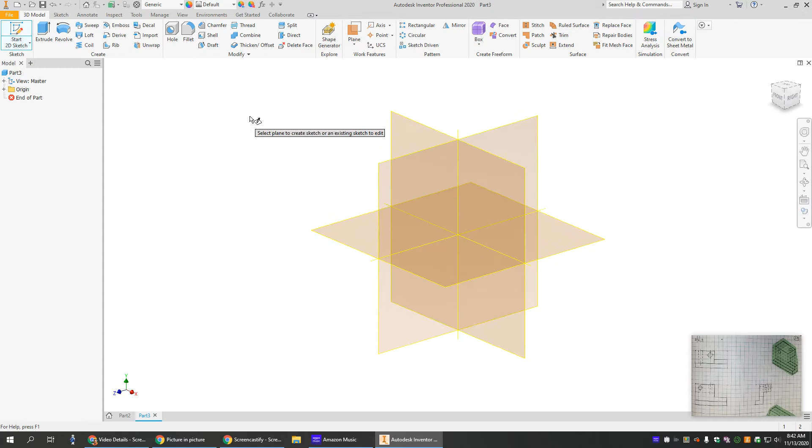All right, in this video we're going to do Isometric 3, which is this weird, funny little shape. So again, we start by clicking the pencil in the upper left corner to start our 2D sketch. I like to start with the front, so I'm going to click the XY plane.

When you draw this one, you have to have a plan of attack. It's got a lot of funny little pieces on it, but I'm going to draw that front view down here. Sorry, that was the top. Here's the front view - I'm going to draw that whole shape, that funny looking flag shape that's laying sideways.

I'm going to do that by drawing a couple rectangles together. It's easier for me sometimes to count using my multi-view since we've drawn a multi-view. So it's 1, 2, 3, 4, 5 up, and I'm going to draw just this first square part, which is also 5 across.

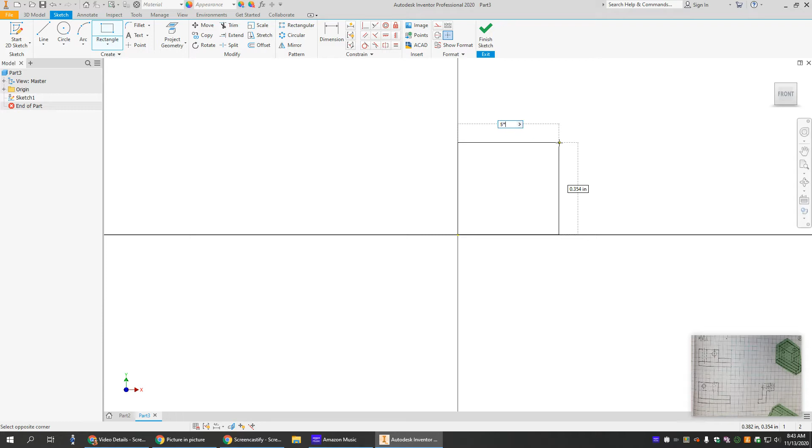Remember, you can do the multiplication in Inventor, so I can do 5 times 0.25 tab, or if you know that's 1.25, you can just type 1.25 and hit enter. Again, it makes it so big you can't see it, so click your view cube front - it zooms it back in.

I've got to make this little piece that sticks off to the right hand side. It is 3 across and 2 high. So I'm going to start right here - when we get the green dot, click and move out. So it's 3 across, which is 0.75, 2 high, which is 0.5. And now we have that flag shape.

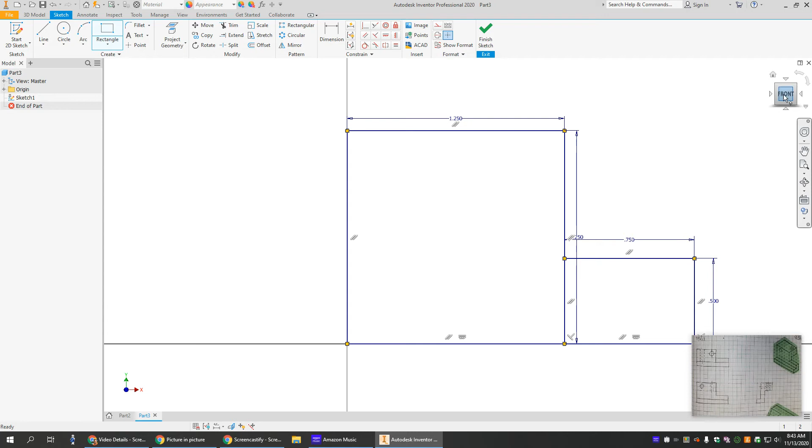So I'm going to go ahead and finish my sketch. Okay, now we've got to decide what we're going to do because we have this thickness. Are we going to make it all the way through and cut some off, or are we going to make just this thin part and add on the pieces?

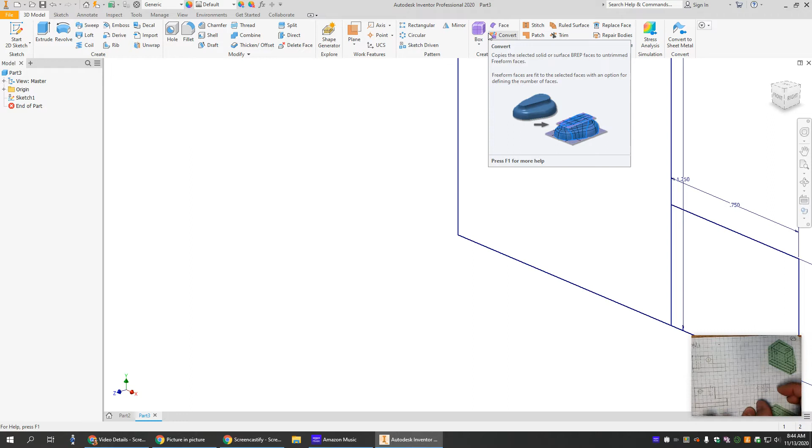I think at this point I'm just going to make that skinny little part from the right-hand side. So I'm going to only make it 1 thick, and then I'm going to add on this little part and that little part on the front. There's lots of ways to do this - it just depends on how you see it. But this is how I'm going to do it.

So I'm going to extrude. I want to extrude this part and this part, but I'm only going to go 1 thick like I said, so it's only going to be 0.25. And say OK - and it looks like, oh, I have nothing.

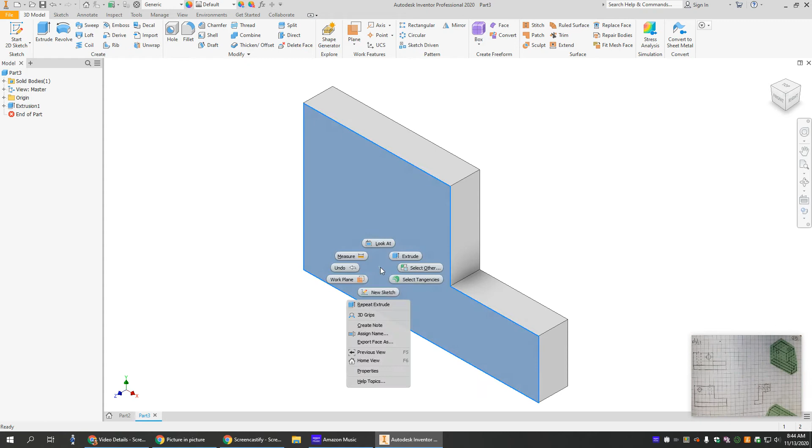So now I'm going to put this little step that sticks out on the front - that little piece that sticks out on the front right there. So I'm going to draw a new sketch on this front, and I want a rectangle going all the way across. I'm going to start here and go all the way across to there, so I want it 2. You can type in 2, which I think is easier, and then 0.25 because it is 1 square high. That's all I need for this part of my sketch.

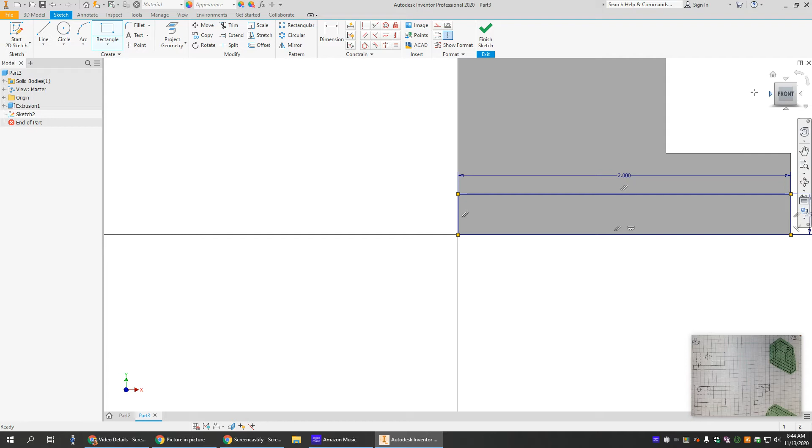So I'm going to finish my sketch. I'm going to extrude that part - since I had 0.25 last time, it remembered and just gave me the same. So I say OK, and now you can see, oh, it's starting to look like it now.

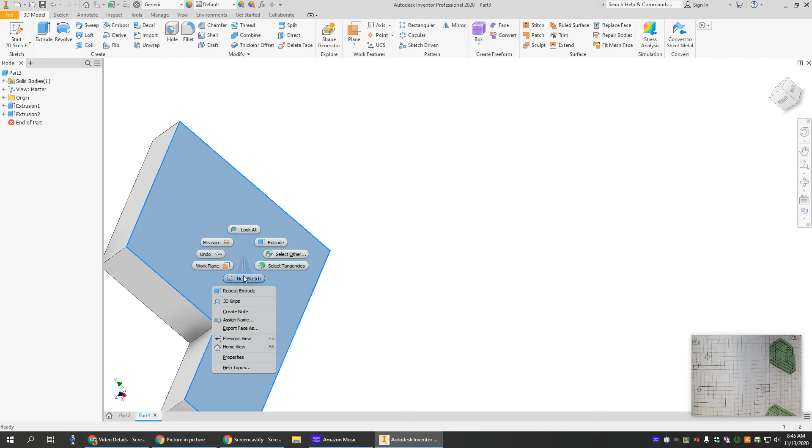But now I've got to draw this little bump on the back. So I'm going to hold down my Shift key, push the scroll wheel, and that allows me to spin it. It doesn't matter how I spin it, just so I can see the back. Right click, new sketch, and it zips around. I'm going to click my view cube, bring it down in the center - it helps me see it. I think it's nicer. You don't have to do it, but it makes my life easier, I think.

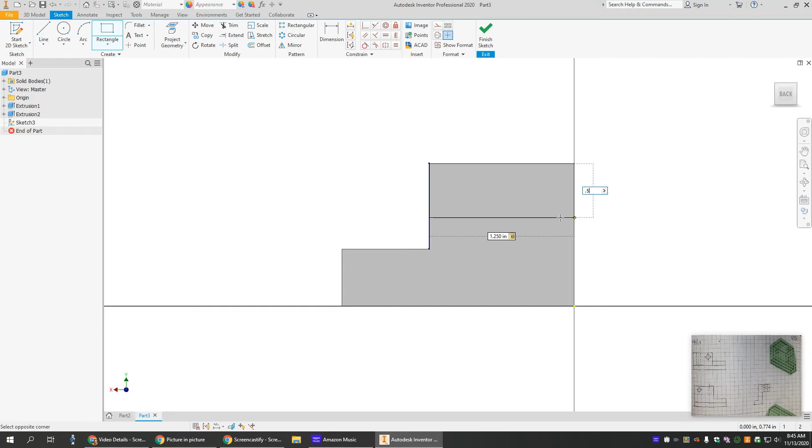I'm going to click my rectangle and draw it across. I know it goes all the way across, which is 5. Then we have to decide how far down it goes—it goes down 2, so 5 is 1.25, and 2 cubes is 0.5, since every cube's 0.25. Once that's done, I'll finish the sketch.

I'll get a better view, then extrude that shape. This time I want to go 2 back, so I'll change my 0.25 to 0.5 and hit enter. Now it's starting to look like what I want.

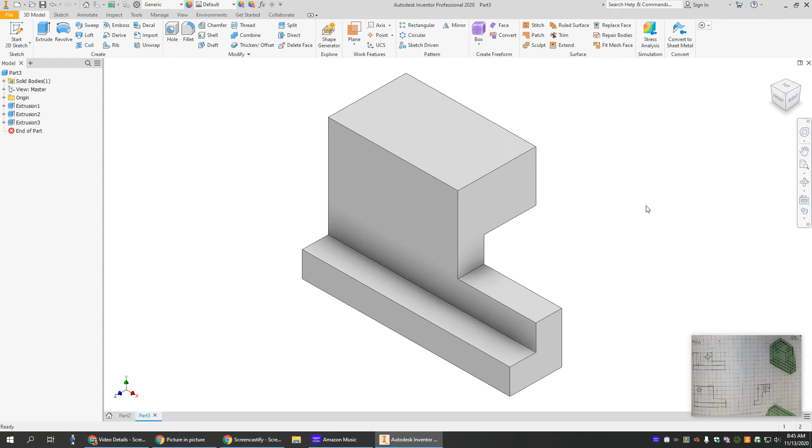Now we just need a couple holes. We're going to use a circle and cut, not the hole feature since we haven't learned that yet, so we have to make these holes manually. Looking at it, they are 0.25 in diameter, both of them.

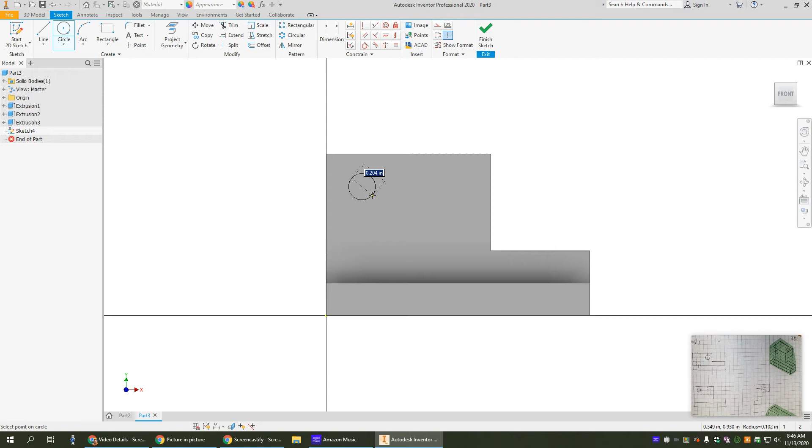I'm going to draw the one on the front first. Create a new sketch on the front and bring it down in the middle. I'll make my circle, draw it anywhere, then dimension it to get it where it needs to be—I need that diameter, so 0.25. There's my hole.

Then I'm going to measure to the center, which is 1 cube down. I'll click dimension, click the center, then click the edge I'm measuring from, which is the top. I'll pull this to the side, click, and now I can type—it's 1 square down.

So that is 0.25, and now I need to do it from the left side. It's 1.5 squares in, which is a bit tougher. Still on dimensions, I click the center, then drag up on this side. 1.5 times 0.25 equals 0.375—you can type that math directly instead of dividing.

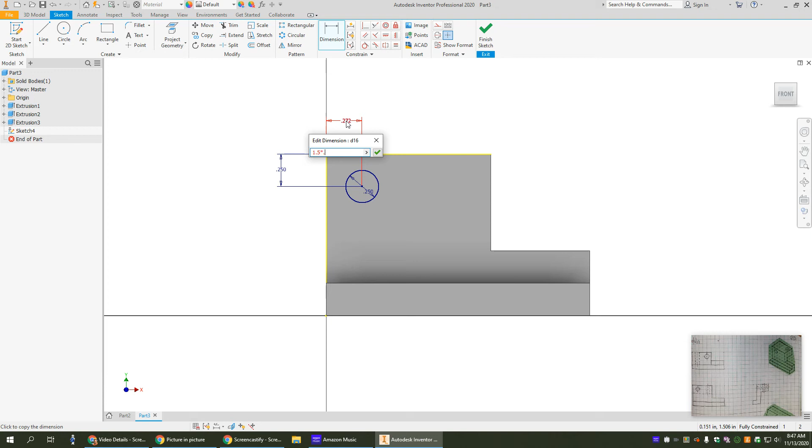If you have trouble doing that math in your head and don't want to get out your calculator, just type it in—Inventor does all the work. Once we have it where we want it, we finish the sketch.

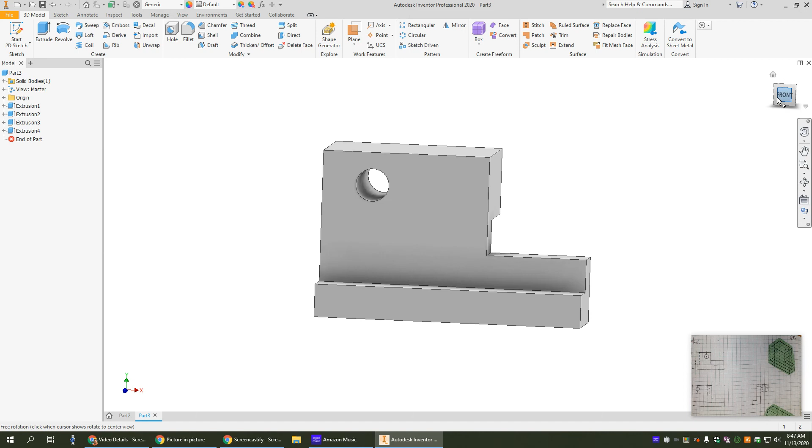We extrude that shape, choose cut, and cut it all the way through. Click OK. Now if we shift to the front view by clicking the front, there's my hole all the way through. I click the house to get back to the isometric view.

Now we need to cut the other hole up top, so I'll right click on the top and say new sketch. Again I draw my circle—doesn't matter where, since I'll dimension where it goes. It's 0.25 again, one square across.

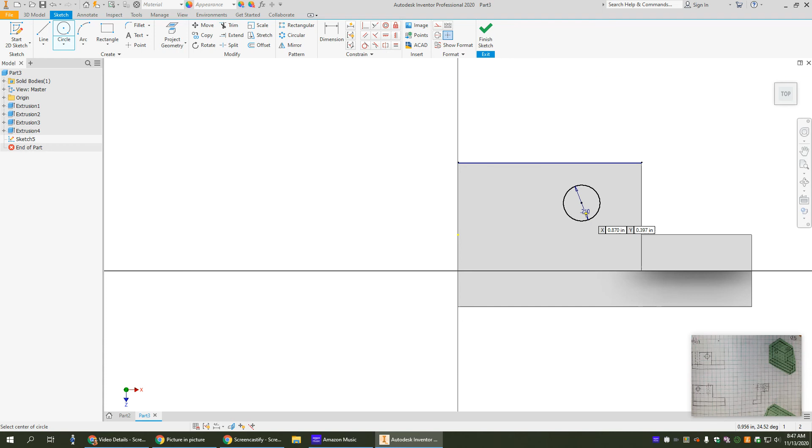Hit enter. Now back to dimension, from the back side—it's 1 square to the center, so 0.25 to the center. I click my center, then click the back, which looks like the top but is actually the back of the piece—it's not really a cube.

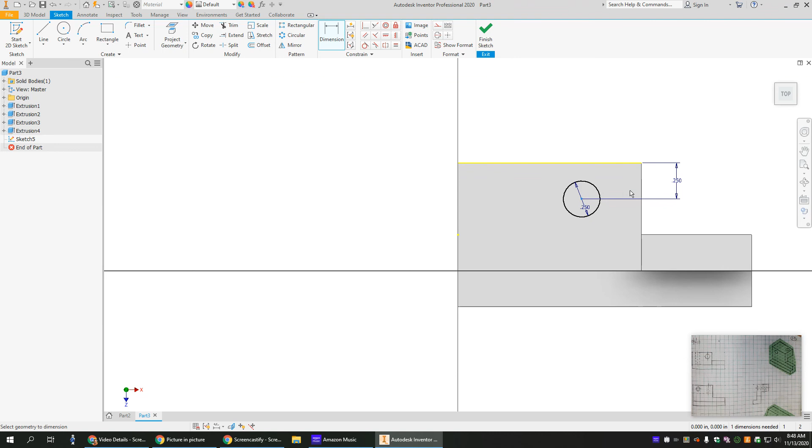Then let's go from the right side this time since it's closer—it's 1 over. So I do my dimension again: go from this right side, drag up, click, 0.25, enter, and now it's placed where I want. Then I finish my sketch.

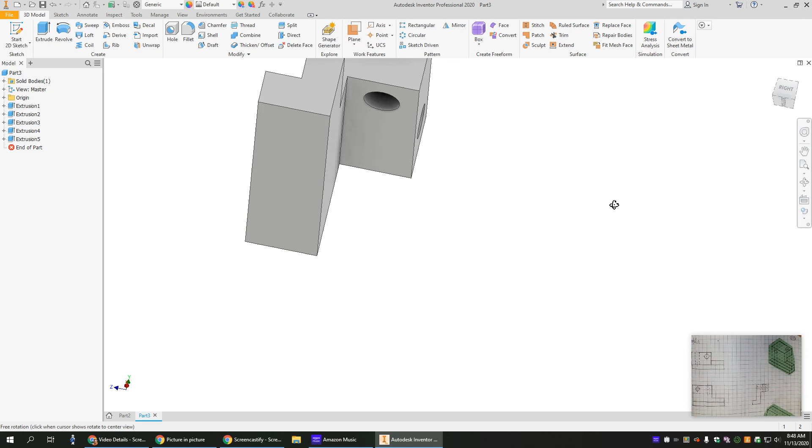I extrude again, but this time I don't want to go up—I want to cut, so I go to the cut output. I want it to go all the way through, then click OK. Now if I turn the part around, you can see my holes go all the way through, and everything looks wonderful.

Now you are all done drawing the part. Click file, save, and save it as Isometric 3.